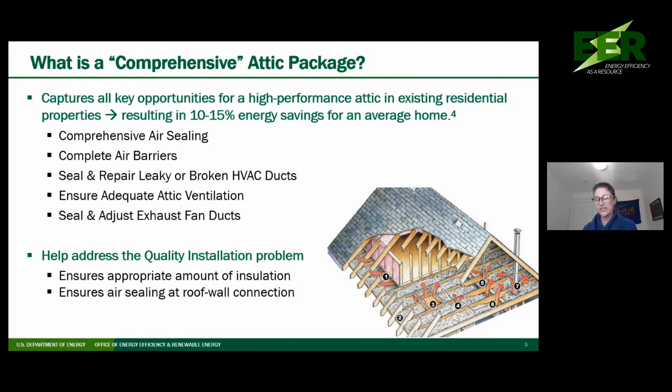So we are particularly recommending a comprehensive attic upgrade at DOE, and that's the resource and the program that I'm going to be talking about with you today. So what makes it comprehensive? First off, it includes air sealing, as well as complete air barriers in the attic. It also includes sealing of ducts, ensuring that you have attic ventilation, and adjusting those fan ducts, and finally the insulation itself. Whereas you might just get some insulation put in there, this comprehensive attic upgrade is really a robust methodology and set of instructions and quality control checklist for making sure you've got the whole package.

So the Comprehensive Attic Package, or CAP initiative here at DOE, is a voluntary partnership with DOE's Home Improvement Expert Program. It includes free resources and a framework that utilities, governments, contractors, you name it, can use to ensure that folks are not just getting an attic insulation job, they're getting a comprehensive attic upgrade program. We think these CAP resources lay out very specifically what those best practices are, delineate off-the-shelf materials folks can use. These are all materials that can be purchased at Lowe's or Home Depot, and ensure that you've got that QA and QC right in the job itself. We hope that the DOE endorsement of the program is beneficial to folks as well.

So there are two checklists available related to the Comprehensive Attic Upgrade Program. One is for vented attics, and one is moving from vented to unvented attics. Both of these checklists, as well as an additional checklist I'll talk about in a little while, have three sections: preparation for the job, what to actually do during the job, and then the commissioning phase, making sure that everything functions correctly.

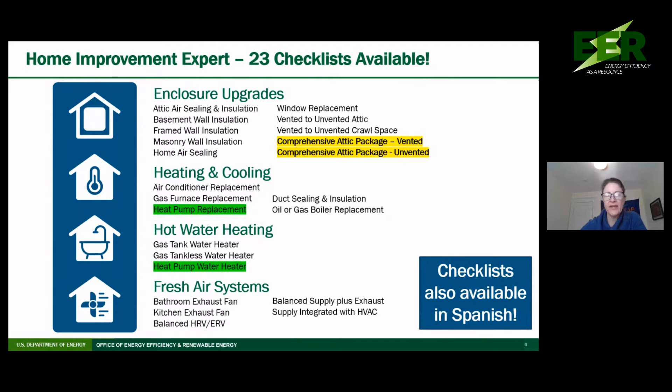Okay, so that's my little spiel for our home improvement expert program, and specifically for attic upgrades and comprehensive attic upgrades. Feel free to reach out to me with questions after this presentation, and I think we'll also be on Zoom, so happy to talk to folks either way. I will stop sharing now and turn it back over to you, Ian.

Really interesting project that you have going there with CAP, and you're absolutely right—there's more to improving an attic and its efficiency than just adding insulation. So really fascinating to see, and really curious to see how the results come from your project with DTE.

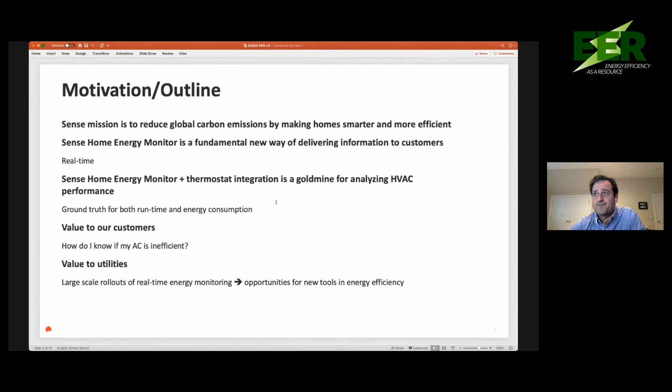How do we do that? We use machine learning to discover the signatures. And as Sense gets installed in more and more houses, this network effect, which is typical of machine learning, our models get better and our accuracy gets better.

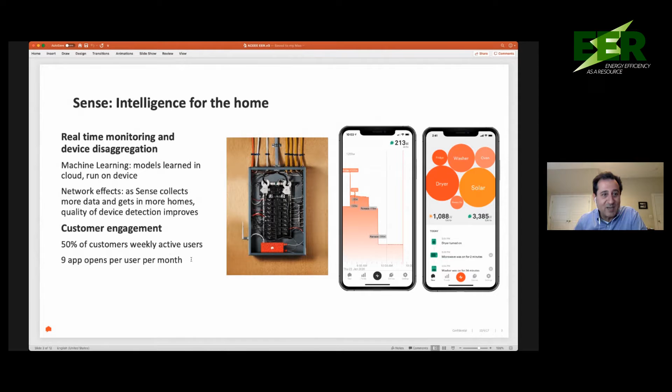The amazing thing with our app is that we all know energy is boring and people don't care about energy. But what we find is that when you give this real-time view to our customers, 50% of them open the app every week, and on average our users open the Sense app 9 times a month to see what's happening in their house, which is amazing engagement.

We said our mission is to reduce global carbon emissions, and by being a retrofit hardware, we cannot accomplish this. Our vision is not to sell more hardware boxes. Our vision is to become part of the infrastructure available to everyone.

We're doing that with two strategic partnerships. First with Landis+Gyr, and Sense is going to be standard software running as part of the next generation meter. National Grid announced the first deployment in New York starting in 2023 in 1.7 million homes, and hopefully more utilities and more customers in the next few years. So that's one path to scale.

The second path, we have a strategic partnership with Schneider Electric, which is a company that makes the Square D panels here in the US. We're working to integrate Sense to be part of the next generation electric panel.

That was the background. How do we go about targeting inefficient ACs? The science part is we started with 1,263 homes that have both the Sense Energy Monitor and a smart thermostat integration, which gave us ground truth at the second level, both on the runtime, which we can get from the thermostat as a verification, and from the energy consumption from the Sense Energy Monitor. So we know temperature, we know runtime, we know consumption, so we can figure out what causes some houses to be inefficient and some houses to be efficient.

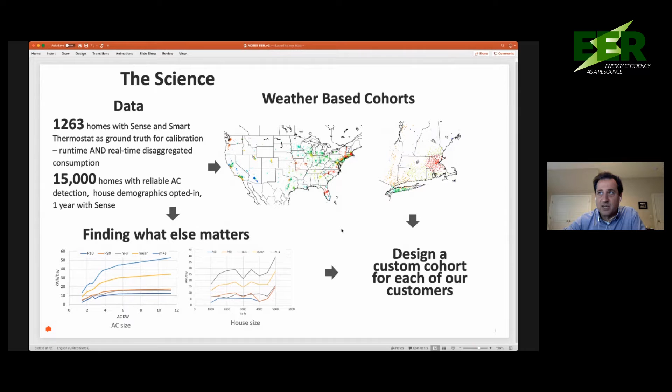Because besides doing the science and figuring out that something like an AC may be inefficient, what's important is how you deliver this message to the customer and how you encourage them to take action. So our view is that everything starts with real-time device detection and monitoring, which creates a trust relation with the customer. They can see when we tell them the AC is running or not. They can tell if we're right or wrong, and if we're right, then they start trusting our messages.

So we've created a new area in the app called Sense Labs, where we are adding intelligence-based features. You'll see here we have a component that detects faulty motors, a component that looks at power quality and voltage anomalies, floating neutral. But we also have a component that looks at their AC energy in comparison with their cohort. And in that particular house, you see this red exclamation point. What the customer would see is that they are spending more energy.

Customized — this is their 250 most similar homes, both in terms of geography, weather, and house size. They can see where they are: in that particular house, spending about 35 kilowatt hours per day to cool their house, and where the 20% more efficient line would be, which for that area would be about 10 kilowatt hours a day. Then a customized message saying that if you become efficient, you could save $717 a year.

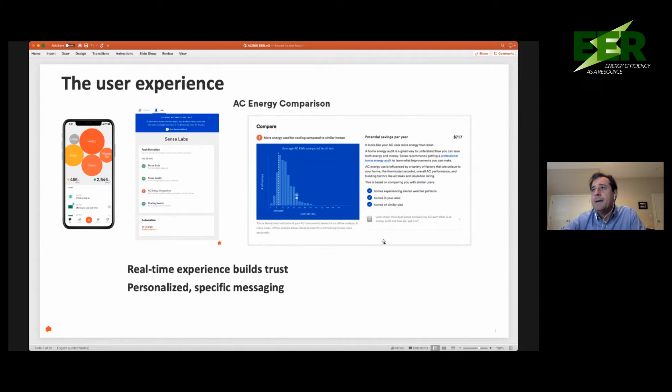So this is the one user experience. And then we go ahead and look at 15,000 users that we piloted this message with.

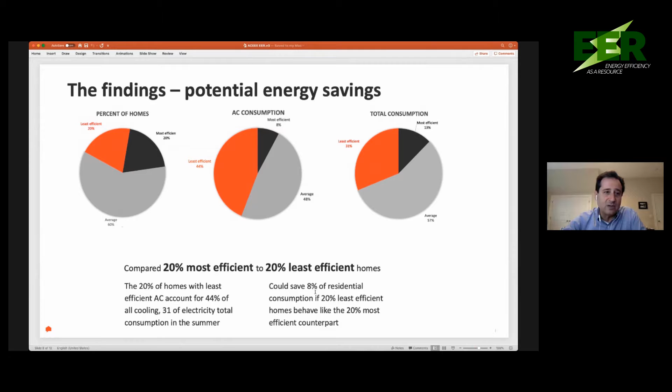We separated our users into 3 cohorts: the 20% least efficient, the 20% more efficient, and the rest, the average houses. The first thing we see is that the 20% least efficient houses are responsible for about half — 44% to be exact — of total air conditioning consumption, and the same homes are responsible for 31% of total consumption. So if we could find a way to make these least efficient homes as efficient as the 20% more efficient, we could save 8% of residential consumption.

And one can dream and put these numbers into context. If you improve one inefficient home, we found that you could save about 5,000 kilowatt hours per year, or about $880, which corresponds to 2.6 tons of CO2. But you can imagine what these numbers mean for a mid-sized utility with 1 million customers — we're talking about 500,000 tons of CO2 and 1 billion kilowatt hours.

And if you project to all of the US, we're talking about billions of kilowatt hours and billions of dollars and 52 million tons of carbon. Okay, not an easy task, but this is what we can accomplish.

Let me give you another perspective about what we can do by having view into disaggregated devices. In California, we can identify the percentage of consumption that is due to shiftable devices, like pools, water heaters, HVAC, and we can identify that cooling represents 88% of the shiftable loads and 46% of peak consumption. So if you could manage to make the 20% least efficient as efficient as the 20% more efficient, then you can potentially generate 13% of peak reduction or load flexibility.

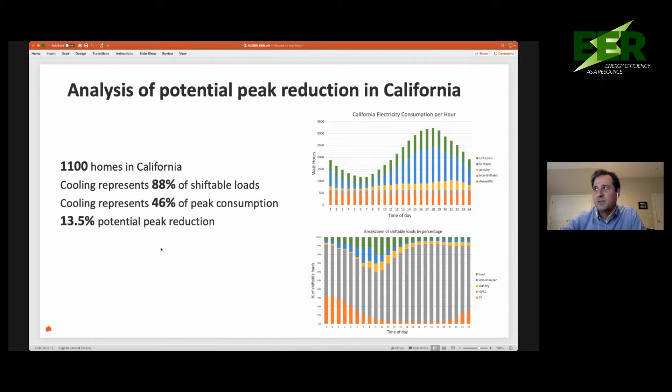To wrap up, our thesis is that in order to achieve results, you need to start with building trust. You need to start by giving a real-time experience to customers so that the numbers about energy make sense to them. Doing that one customer at a time, you can accomplish results. And by getting built into the infrastructure, we can bring network effects and scaling and new insights. We can bring personalized messages with specific, credible information about savings.

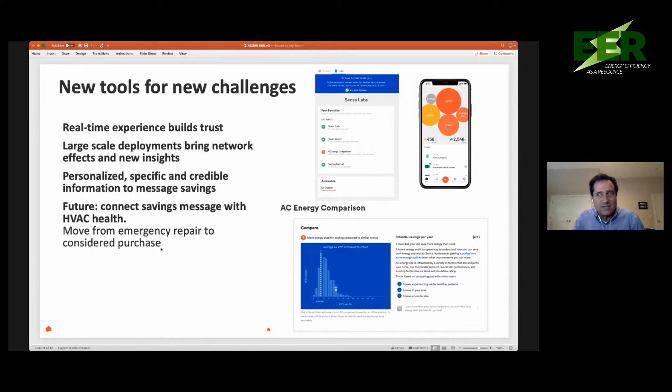And what we're working to is try to connect our savings message with advanced monitoring capabilities that have to do with HVAC health. It's one thing to tell you that you have an inefficiency and that you have to fix it. Where we want to be is we want to tell people, hey, you have an old AC, we see signs that it needs maintenance. Let us educate you. We need to move from an emergency repair to a considered purchase so that we can achieve these savings. And thank you very much. I'll answer any questions.

Fascinating technology that you're working on at Sense, and certainly has the impact, or the potential impact, to really get homeowners on the behavioral side of things to start looking at their consumption and how it's broken out by different products within their home. So I'm curious to see how the audience views that and has some questions with regards to your technology.

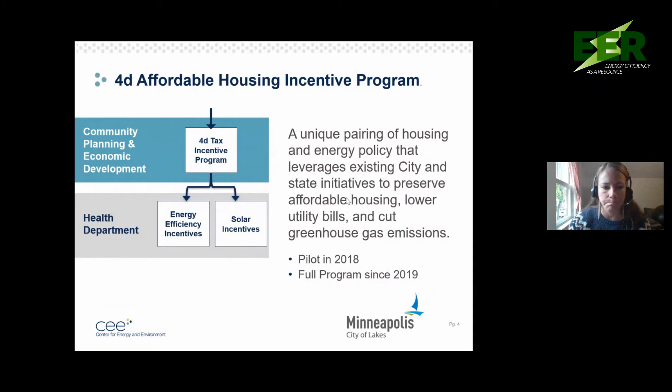So it was a pilot program in 2018 and then became a full program in 2019. Again, the notion of this was an attempt to preserve naturally occurring affordable housing, both with that policy initiative as well as the incentives for energy efficiency and solar. Naturally occurring affordable housing historically has not received subsidies for construction and has a lot of deferred maintenance because of that. But rents tend to be below 60% area median income, which is oftentimes thresholds for accessing other resources. So this is a way for Minneapolis to identify these properties and get them some resources.

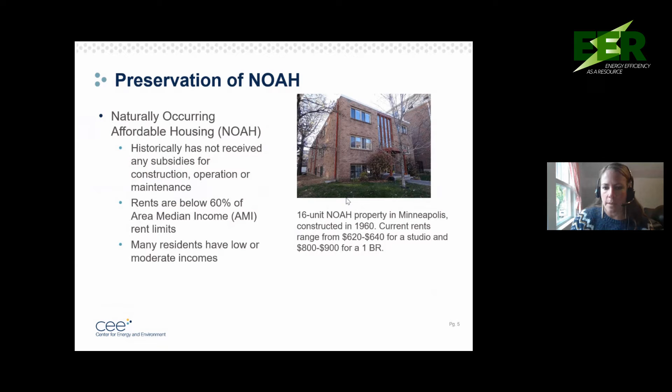Here's just a small example of one of the NOAH properties in Minneapolis. And here's a few other snapshots of what this segment looks like. It's got a lot of different shapes, sizes, and vintages. So I would say to characterize this housing stock, it tends to be smaller, it's all rental, and I would say in the 1 to 20 unit range typically, and oftentimes towards that even smaller. Minneapolis has a lot of older duplexes, so that's a big part of this program segment.

So just a little bit about the commitments and the incentives for this program. As far as getting enrolled in the tax incentive, a property owner has to commit to affordability for 10 years. At least 20% of the units at a given property has to remain affordable and house residents that make less than 60% area median income.

There are rent restrictions and increases built in, but those are restricted. I already talked about the 40% property tax incentive on all 10 years for the eligible units. There's also a couple other incentives sort of as sign up happens.

In Minnesota, we have a low income rental classification list that fee and registration gets all completed as part of this application, which is key to kind of the gist of this presentation, which a lot of utility programs use that published list to identify income qualified properties. So it's a really good synergy there.

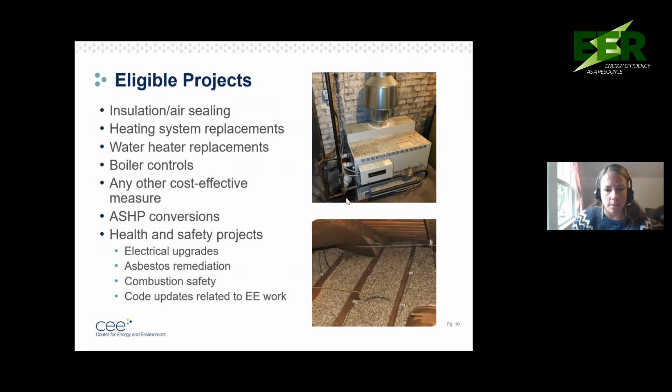Here are some eligible projects. This is probably very recognizable to most of you. Pretty cost-effective measures. But like I said, it includes air source heat pump fuel switching conversions, which up to this point has not been able to be covered by our utility programs. Hopefully that will change to some degree in the future, but those have been mostly covered by the city. And then some health and safety projects that are kind of common in this sector and in these projects.

I remember that 2018 was a pilot year. And so in the subsequent years, we've been hovering between 20 and 30 projects per year. I think we're about 30 this year.

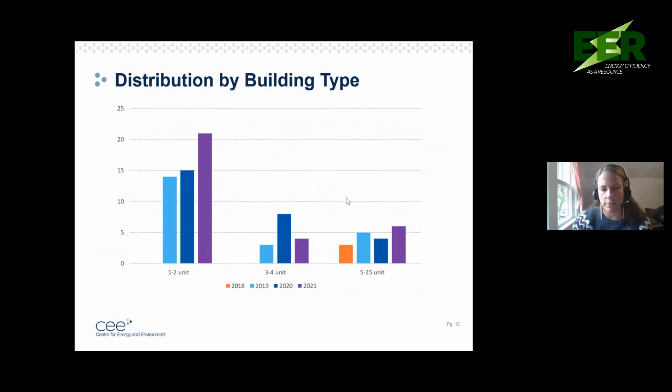Again, to note that a lot of these buildings are smaller in size in terms of multifamily rental. In 2018, the pilot was only open to 10 units or more, so that's why they're all in the 5 to 25 unit bucket. But primarily, we're dealing with duplexes, triplexes, quadplexes, and then kind of a smattering of somewhere between 5 and 20 units in that last bucket.

Because the cost per unit is higher on smaller buildings, it does end up increasing the cost per unit, and that's for various reasons. A lot of the duplexes, triplexes, and quadplexes are older than a lot of the bigger buildings, so they need more shell work, and there's more envelope-to-unit ratio as well. So I just wanted to note that the costs are not quite linear on a unit basis.

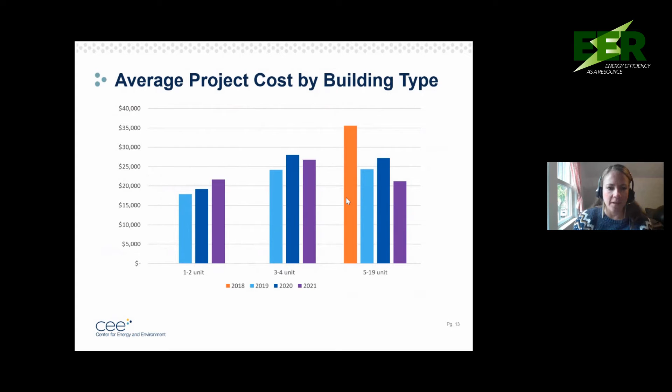And in these building types, those utility bills are almost always paid by the renters. And so a lot of that benefit is going directly to the low-income renters.

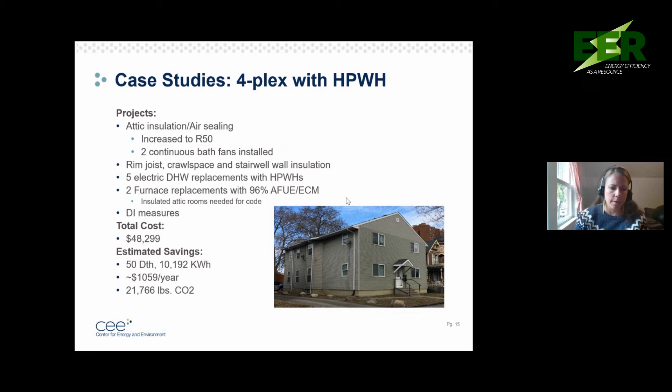And again, about $1,000 per year in estimated savings for the building.

So the real meat of this that I want to make sure I cover is just kind of lessons learned and feedback. Because this program was developed alongside utility programs that already existed, there's been a big need for the services that CEE provides to navigate these programs and make sure we're helping property owners access all these funds to leverage the city's dollars. The property owners appreciated all of that help — some properties had to apply to 4 different organizations to get work accomplished and get the leverage we wanted for them.

Upfront cost has sometimes been a barrier. All of these incentives are post-work rebates, so the customer is ultimately only responsible for 10% of the project cost, but initially they're responsible for 100% of that cost. So depending on the size of the property and access to upfront capital, that can sometimes be a barrier.